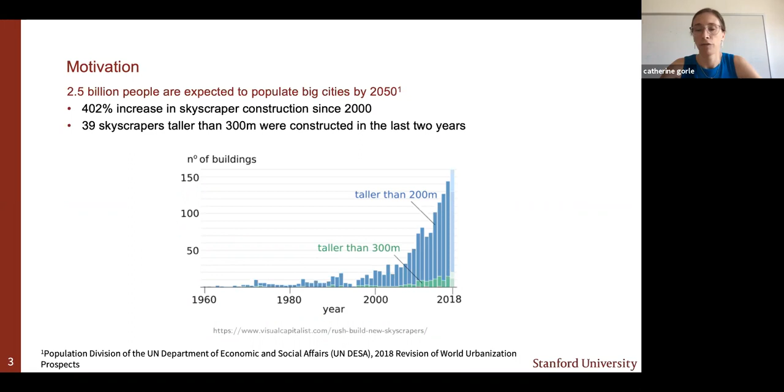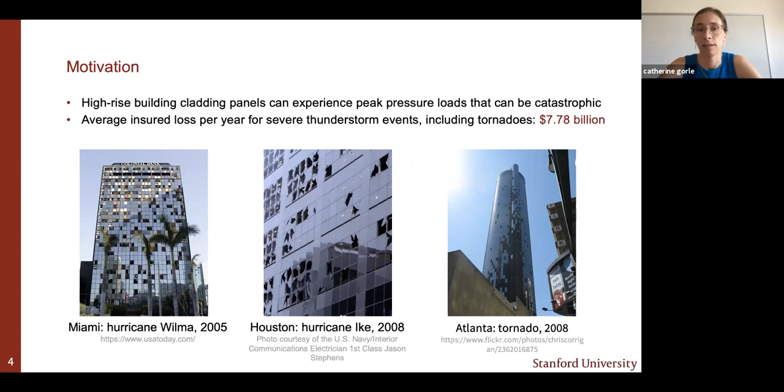So when we try to understand wind loading on buildings, there are different methods that you can use. Currently in engineering, you can use standards or codes where you compute design pressures and loads using empirical expressions. The advantage of that is that these are very straightforward calculations to do. The disadvantage is that they will have limited accuracy because you might, for example, have interference effects with surrounding buildings, or you might be looking at complex building shapes for which the empirical data was not necessarily obtained.

So the solution when wind loading is really a critical consideration in design is to do wind tunnel tests. And what you do in wind tunnel tests is you're going to record time series of pressures or forces on a scaled model in a wind tunnel. The advantage of this is that it's the established method for engineering design. We know how to do this and it's been done like that for decades.

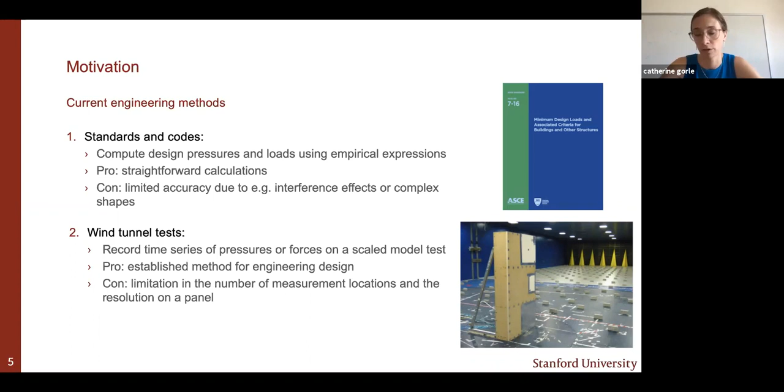A challenge though, when you really look at the design of cladding, is that you have a limitation in the number of measurement locations that you can put on a building and the resolution that you can achieve. Standard wind tunnel tests will sometimes only have one pressure measurement on the area that would be covered by a panel. And making the decision on what the average wind load on the panel will be based on just this one single measurement can lead to both over and under dimensioning of your system. And this is where CFD could actually provide a valuable alternative.

The advantage of CFD is that you would get a complete three-dimensional solution for the flow field. So your number of pressure taps is basically equal to the number of cells on the building facade. So now you can decide, given the size of my cladding panels, how many cells do I want to put on a cladding panel to calculate a good average load.

The disadvantage is that in CFD, you always have a trade-off between accuracy and cost. The main choice to be made is really how you're going to deal with turbulence. Either you do simulations that resolve larger scales of turbulence, those are large eddy simulations - relatively accurate but more expensive. When you do Reynolds-averaged Navier-Stokes simulations, you only solve for the mean flow, so you need to model all of the turbulence. These are much faster, but they won't be as accurate.

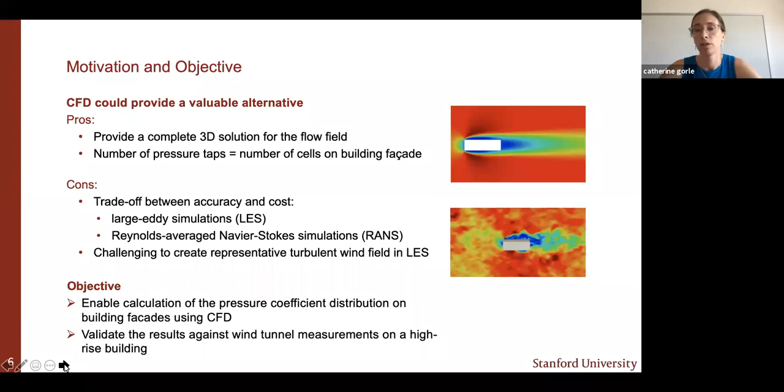In addition, it can be challenging to create a representative turbulent wind field in these simulations, and that particularly applies to large eddy simulations. So the objective of our work has been to enable the calculation of the pressure coefficient distribution on buildings using computational fluid dynamics. We focused on a high-rise building, and our goal is to validate our results against available wind tunnel measurements.

So this is a brief overview of the things I'll go over in this talk. First, I will introduce the test case and our quantities of interest in more detail. Then I'll give you a brief overview of the different steps, the different things that you need to think about when you set up a CFD simulation.

And then we'll go to how we generate a turbulent wind field in a large eddy simulation. I'll discuss how we set up the simulations and then how we do an optimization to actually get the wind field that we're looking for. Then we'll apply this to the simulations of the high-rise building.

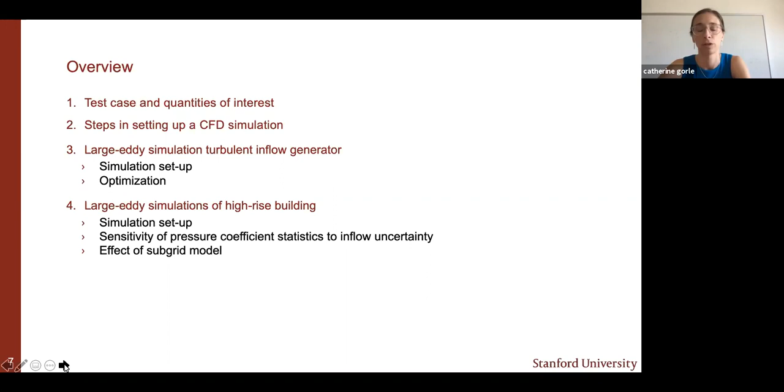So I'll again show you how we set up the simulation, and I'll discuss what the sensitivity is of our pressure coefficients to this inflow uncertainty. I'll also briefly touch on the effect of the subgrid model for turbulence. Then, depending on time, I might spend a little bit talking about Reynolds-averaged Navier-Stokes simulations as well, before wrapping up with conclusions and outlook.

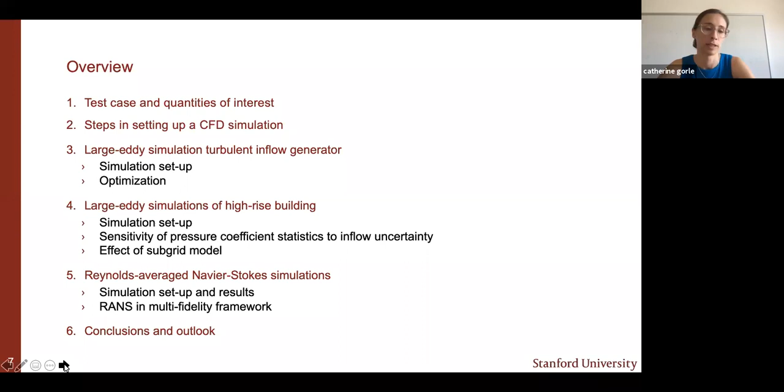Okay, so let's start by looking at our test case and the quantities of interest. We're looking at this high resolution experiment on a high-rise building, and all of the details on this experiment can be found in Luca Amerio's PhD thesis. We also have a paper in press comparing the measurements in Milan and the Wall of Wind.

Both of these data sets, the one from Milan and the one from the Wall of Wind, are available online. So if you're interested in looking at this test case and using it for validation of simulations, these data sets are freely available.

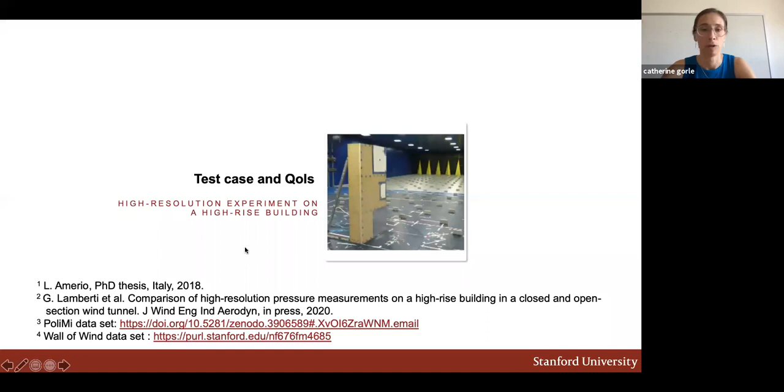So the case that we're looking at here is a 1:50 scale model of a rectangular plan building. It's 2 meters high in the wind tunnel, 1 meter long and 30 centimeters wide at model scale. It's tested in a closed loop wind tunnel of the Politecnico di Milano. In this wind tunnel, they generate an atmospheric boundary layer, a turbulent wind field, using a combination of spires upstream and then roughness elements further downstream.

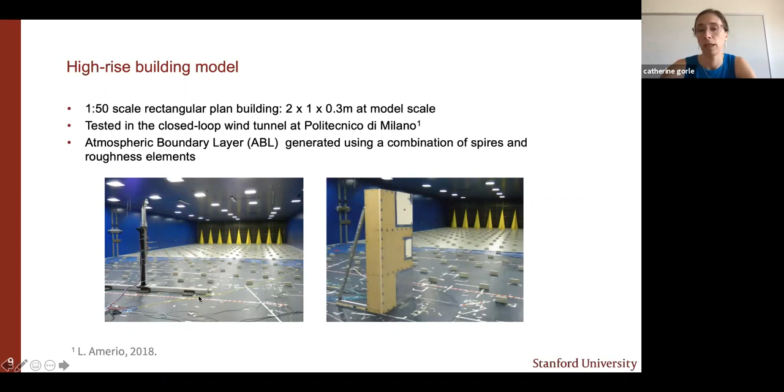And then you have the turntable where the building is located in this picture. But what they did first in this experiment is to really carefully characterize what the atmospheric boundary layer flow is that you get using this setup. And that's what you see in this slide.

They measured 5 profiles at different span-wise locations here on that turntable, at 52 vertical locations. The measurements were done with 3-dimensional hot wires, and we have 20-second time series with a sampling frequency of 2000 Hertz. So for each of these span-wise locations, we can now go and calculate statistics.

And what you see on the right here is the mean velocity profile, which follows a logarithmic law. We show both the mean of the 5 span-wise locations, but also the variation that you see over these different locations. The characterization of that variation was extremely useful when we did our simulations, because we could go and look at what is the sensitivity of our simulations to that uncertainty that we see in the wind tunnel.

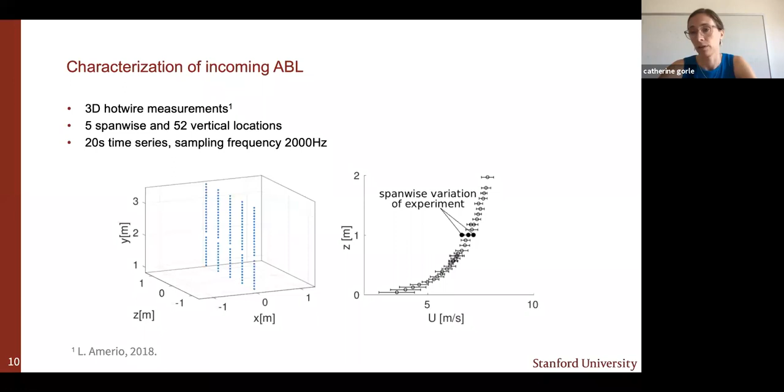The pressure measurements on the building - you see a side view here of the building. We're going to focus on the case with a wind angle of 0 degrees. And they have a focus on the critical locations near the corners and the edges, where you expect these high suction peaks to occur in the flow.

We have 224 pressure taps on each of these tiles, resulting in a minimum tap spacing of about 3.4 millimeters, so extremely high resolution. There are 300-second time series with a sampling frequency of 500 Hertz here. In this presentation, we'll combine the data obtained at 0 and at 180 degrees because of symmetry, which will allow us to look at the full pressure coefficient distribution on the top of the building, and then we'll have one tile upstream and one tile downstream as well.

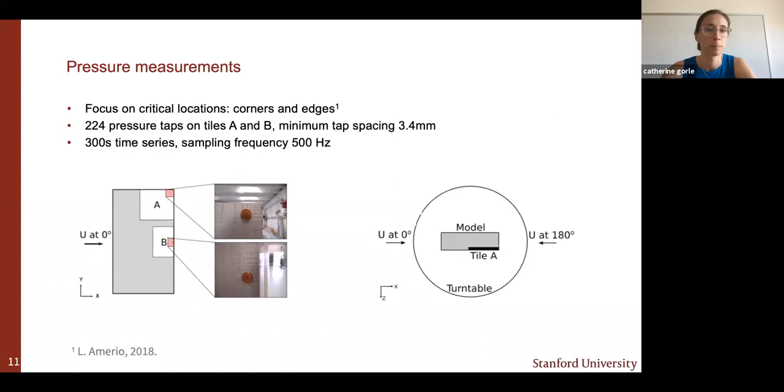These are results from an LES simulation, just to give you a sense of what flow topology we're looking at. The colored contours show the streamwise velocity magnitude. You see the incoming boundary layer with a logarithmic profile, so lower velocity magnitudes near the ground than up high.

That impacts the building, the flow goes up and down and to the sides of the building. So that results in unsteady separation regions, both on the building roof and on the building sides, and we also have that unsteady wake behind.

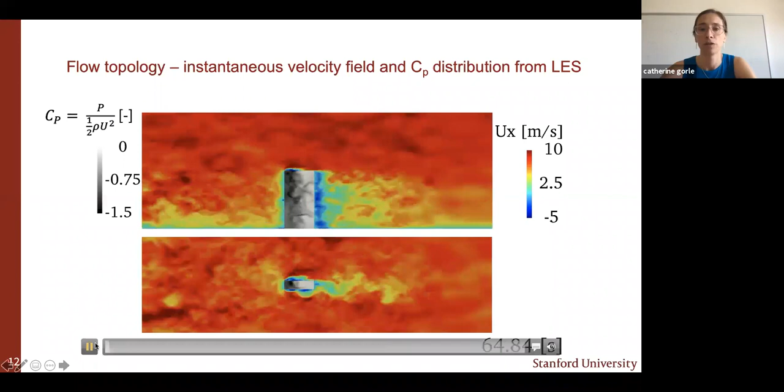The black and white contour here is the pressure coefficient, the non-dimensionalized pressure on the building facade. You see that where you have that unsteady separation, you get higher suction values that could result in failure of the cladding system.

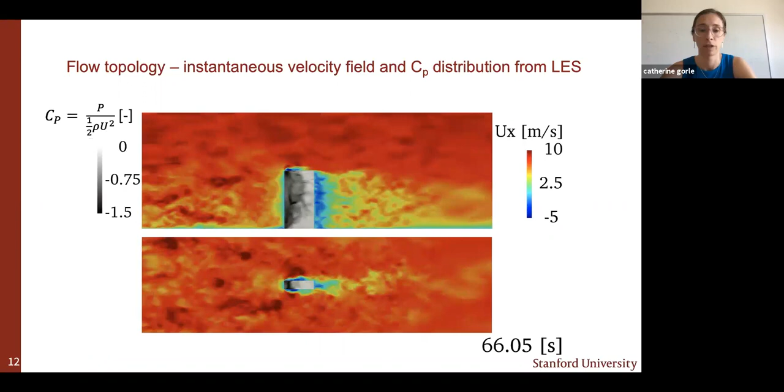So we're really interested in understanding what the time statistics of these pressure coefficients on the building facade are, because these are what will determine the wind loads on the building.

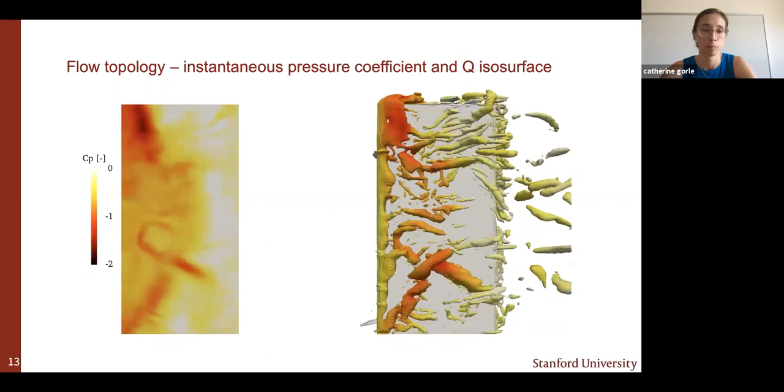When we look at a turbulent signal of a pressure coefficient, you would see something like this: time on the x-axis and Cp on the y-axis. We're interested both in looking at the mean pressure coefficient, the root mean square of this signal, but also the peak pressure coefficient—what are really the peak loads that you will see?

Because we have these point-wise measurements, we can look at local peak pressures, but what is really of interest for engineering design is the peak pressure load on an entire panel. So you want to average over the panel first and then calculate the peak load. These will be our four quantities of interest that we'll be looking at.

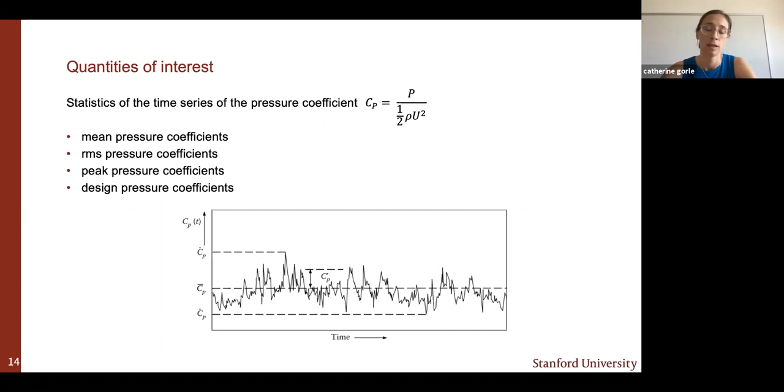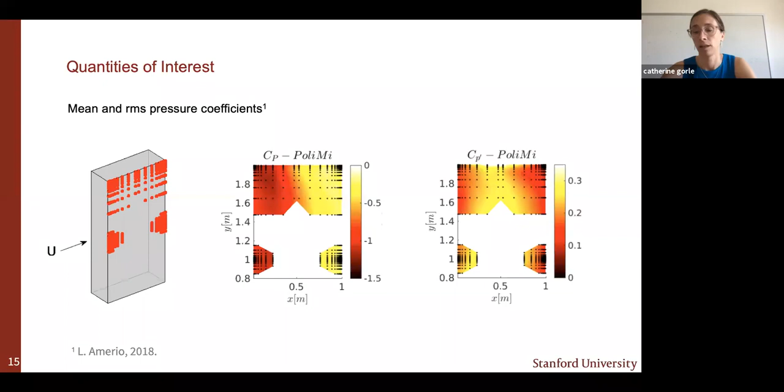Then to get to the peak pressure coefficients, we don't just look at the time series and extract the most negative peak—there is actually a statistical process to determine this, and we do that using the Cook and Mayne method.

So you look at this time series of Cp, and for a peak coefficient, that is the value in one pressure tap. For the design pressure coefficient, that is the value averaged over all the pressure taps on a tile.

You divide this time series into a number of windows, and in each window you extract the most negative peak. Once you have done that, you fit a Gumbel distribution to all of these peaks so that you can find the pressure coefficient relative to a specific probability of exceedance. In our case, we'll look at a 22% probability of exceedance. So what these look like is the following.

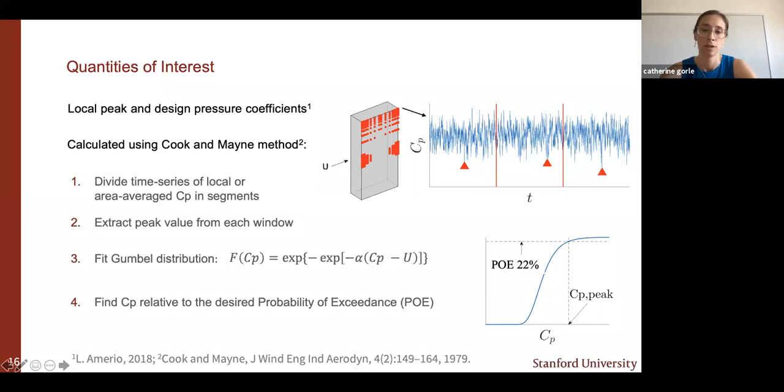So first I'll show you the local peak pressure coefficient at each of the pressure taps. You see that you get these highest values inside of the separation bubble.

Then when we look at the design pressure coefficient on the cladding panel near the top corner, we look at different panel sizes. You see that the CP design becomes less negative as you look at bigger panel sizes, because you're starting to filter out these local negative peaks.

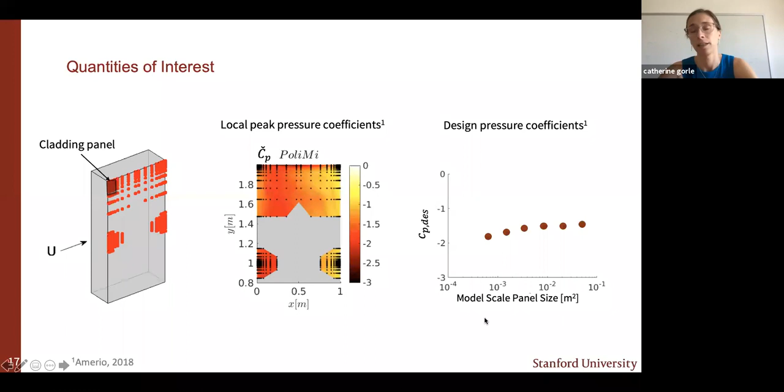This is actually important when you think about doing simulations, because getting these local peaks exactly right will be very difficult - that would require resolving all of the turbulence. But getting the design pressure coefficient right becomes a little easier, because you're actually averaging over an area.

Okay, so in the next part here, I want to go over the steps in setting up a CFD simulation. The idea here is really to highlight what the things are that you have to think about when you set up a CFD simulation, such that you're following best practice.

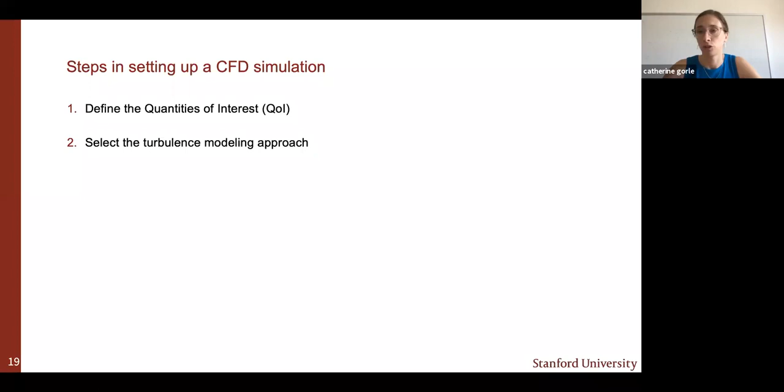The first step is always to define your quantities of interest. We've done that here - we said we're interested in the statistics of a turbulent pressure coefficient. When you know what you're really interested in, you can go and select your turbulence modeling approach. This is probably the most fundamental choice you're going to make, so let's look at that in a little bit more detail.

Turbulence is one of the unresolved problems of classical physics. It's characterized by unsteady aperiodic motions with random three-dimensional spatial variations. There's a strong dependence on the initial conditions, and in a turbulent flow you see a wide range of scales that we call turbulent eddies.

What we often do in a turbulent flow is look at an energy spectrum - what is the energy content at different frequencies or wavelengths in the flow. What you see in turbulence is that you have larger scales where you have production of turbulence kinetic energy, then an inertial subrange where that energy is moved from the larger scales down to the smaller scales where you then have dissipation.

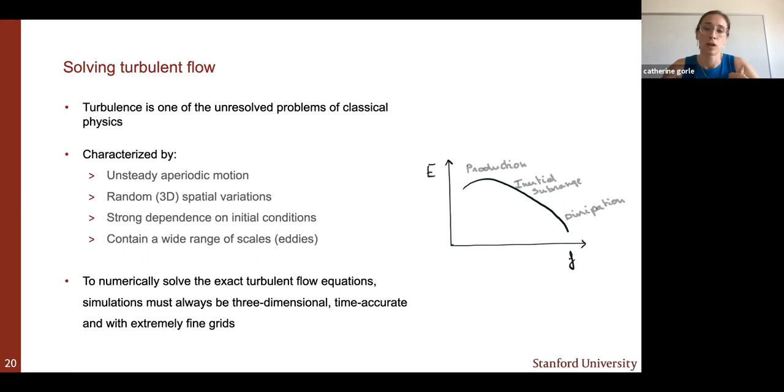If you want to numerically solve the turbulent flow equations fully, then your simulations have to be three-dimensional, they have to be time accurate, and they have to resolve all of these scales that you see in the flow, which requires extremely fine grids. So if you look at the different ways of solving a turbulent flow, it basically reflects how much of the turbulence you resolve.

A direct numerical simulation will resolve all of this turbulence, but that is not affordable for the type of simulations that we're looking at. Our Reynolds numbers are too high and our geometries are too complex.

So the next best thing that we can do is a large eddy simulation. In a large eddy simulation, we're going to be resolving these larger energy containing scales of turbulence, and we're only modeling what happens at the subgrid scale. These simulations can still be very accurate, and they are actually feasible for complex engineering flows.

Then the next step you could do is Reynolds averaged Navier-Stokes simulations. If you do this steady Reynolds averaged Navier-Stokes simulation, you only solve for the mean flow, and you would be modeling all of the turbulence. You can imagine that coming up with a model that represents all of these scales and their effects on the mean flow is much more difficult than this.

We've been trying to develop good turbulence models for decades, but still for bluff body flows, like what we're looking at in wind engineering, these models will not be very accurate. They are, however, very quick - you can get a solution in a matter of hours, while here we're talking more about weeks.

So I'll be mainly focusing on large eddy simulations because it's generally accepted that for wind loading, you want to be resolving these turbulent scales of motion. If I have time, I'll touch a little bit on RANS simulations at the very end.

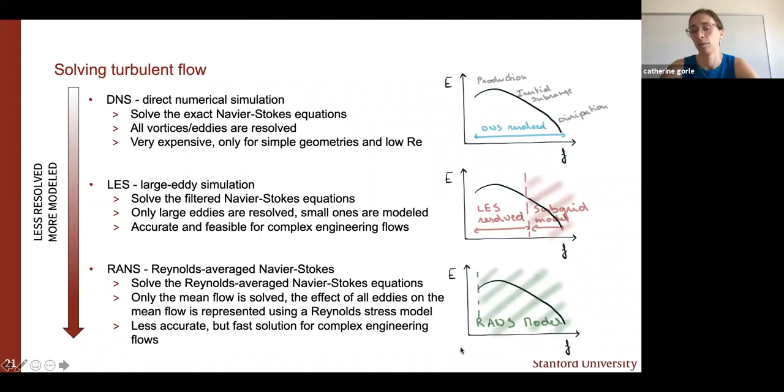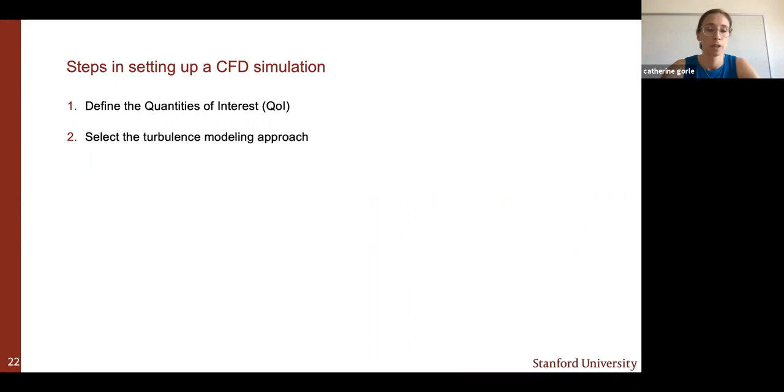So you select your turbulence modeling approach, and then after that you have three steps that are basically about setting up your model, your mesh, and how you're going to solve your equations.

You need to define your geometry and computational domain, which means thinking about the level of detail in your model. For example, if your building has balconies, will you be resolving those in the geometry? You need to think about the size of your domain and the position of your boundaries, since you don't want unintended effects of your boundary conditions on your flow solution.

Then you have to generate your computational mesh, discretizing your computational domain. Mesh quality and resolution are very important because you want to resolve all of the important features in your flow. Checking grid dependency is essential. We will never do a simulation with just one grid resolution; you will always check what happens with different resolutions.

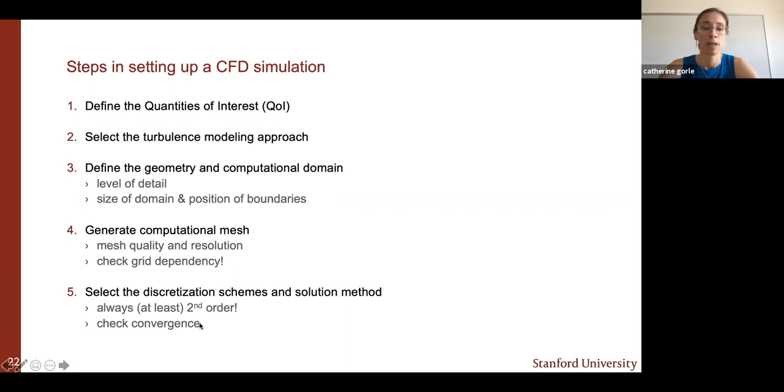Then selecting discretization schemes and solution methods, you always want to use at least second order schemes, and it's very important to check convergence of your solution. I'm not going into a lot of detail here because there are best practice guidelines available for all of these. So if you're setting up CFD simulations, it's a good idea to check these best practice guidelines.

Two of these focus on RANS simulations, but there is one that goes more into LES. The concerns you have in RANS simulations, for example the geometry and the boundary conditions, are also very similar to those in LES.

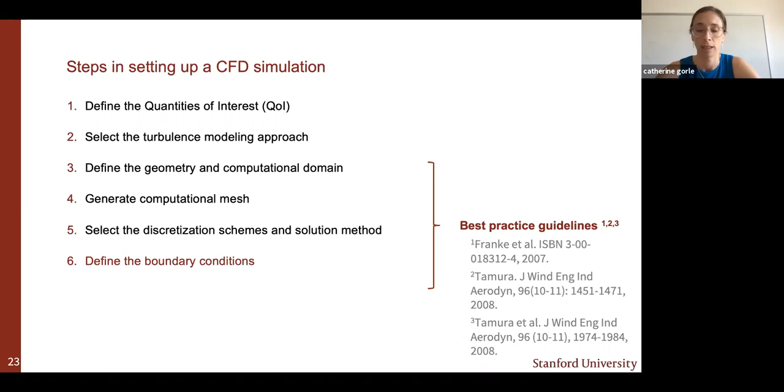The other thing you have to do is, once you have your domain and know where your boundaries are, you also have to define your boundary conditions. There is some guideline on that in best practice guidelines, especially for RANS. Here I'll discuss much more what we will do for LES in our sections on the actual simulations.

Then setting up post-processing—when you do LES, that actually requires very careful consideration because you cannot afford saving your entire flow solution at every single time step. So you need to think in advance about where you want to save time series, and what kind of mean flow solutions you want to save as well. Validation is the other thing I'll address in detail as we move on.

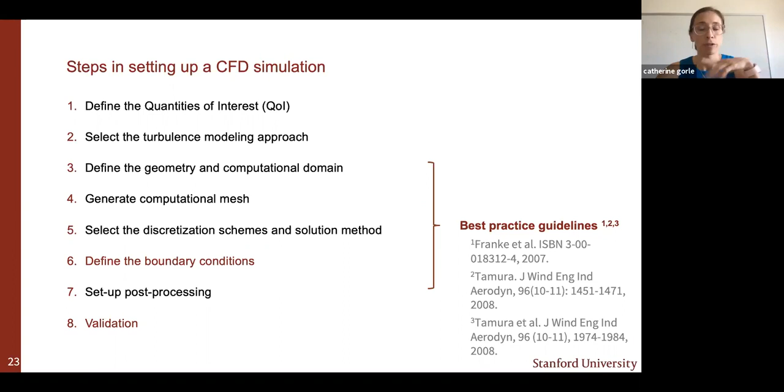The boundary conditions are really very important, and I mentioned already in the beginning that especially the inflow boundary conditions in LES can be challenging. So I want to spend a bit of time talking about how we do this in a large eddy simulation. Since we're trying to validate against a wind tunnel boundary layer, our focus here will really be on reproducing the boundary layer that we see in the wind tunnel.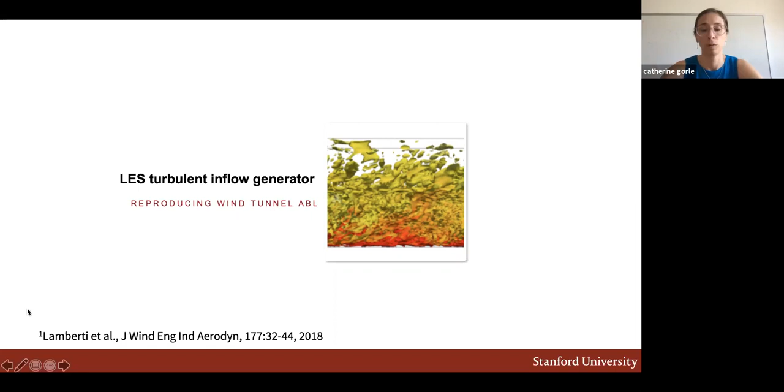This has been published in this reference here, so if you want more details you can look there as well. The setup of this inflow calibration looks as follows: in this picture on the right, you see what our domain looks like with the high-rise building in it. We have a relatively long domain—our high-rise building is about 5 meters from the inlet of our computational domain.

What we want to achieve is that our turbulence statistics at the building location will actually match the statistics we see in the wind tunnel. So what we do here is specify a slightly smaller domain to make sure the simulations will be affordable, and we ensure that whatever we specify at the inflow gives us the turbulence statistics we want 5 meters further downstream.

The size of this domain is 10 meters long, 4 meters high, and 3 meters wide, discretized with 5 million cells. Our first cell height is 6.25 millimeters, giving us a Y plus of around 300 on the ground wall. That's a non-dimensional wall unit that tells us how much of the near wall turbulence we will be resolving. In this case we're not resolving it, because we would need a Y plus of 1 to do that, which implies we'll need some sort of wall function, which I'll talk about as well.

We set up this simulation with the most simple subgrid model, because that was the starting point—we wanted to see with the most simple model what kind of results we could obtain.

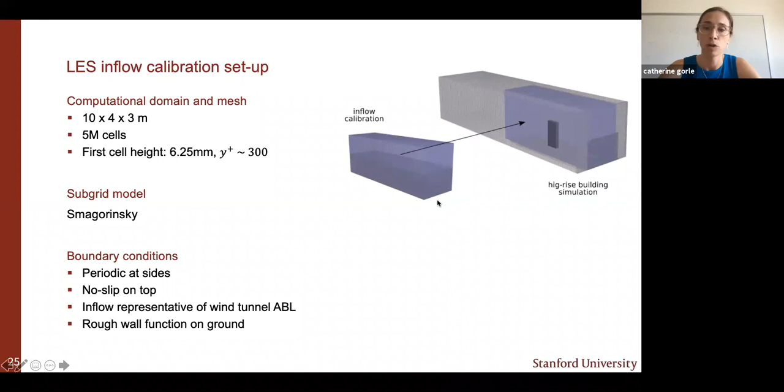I'll talk more about the inflow and the rough wall function on the next slide. In terms of the solver, we use OpenFOAM with a pisoFoam solver, which is also the solver used in all of the SimCenter tools. We use second-order discretization schemes and second-order implicit time stepping with a time step of 0.002 seconds, giving a CFL number of less than 0.2.

In large eddy simulation, it's always important to let the turbulence and flow develop to a quasi-steady state before you start taking values for statistical averaging. Our burn-in period was 60 seconds, and statistical averaging was done over 160 seconds. These simulations took 5,000 CPU hours on 32 processors, about a week on Stampede2. These are really representative of what you'd get using the SimCenter tools, since they also use the Stampede2 cluster.

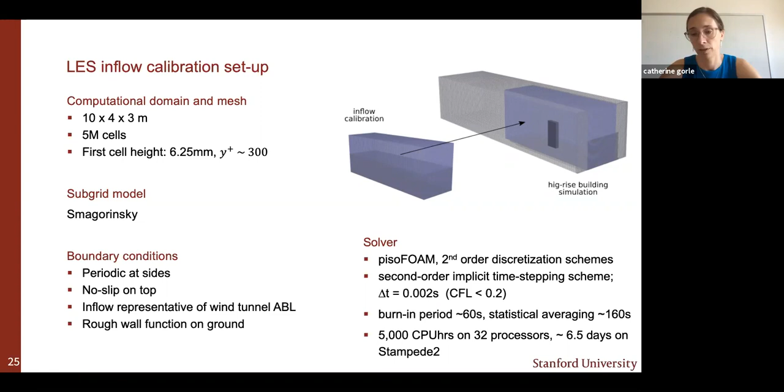Let's look a bit more at what we need if we want our flow to be representative of the atmospheric boundary layer in the wind tunnel. In terms of the mean velocity profile, we want something that follows a log-law fit, and you see that here from the wind tunnel data: a friction velocity divided by the von Karman constant, then the log of the height above the ground, and the roughness length Z0.

In order to sustain that mean velocity profile, you have to make sure that your boundary condition on the floor of your domain, or the floor of your wind tunnel, supports this. This is what you'd see in standard CFD codes - people have looked at this a lot for Reynolds-averaged Navier-Stokes simulations, and you need to do just the same for a large-eddy simulation.

If you're not careful and you impose a log-law profile like this one at the inflow of your computational domain, and just solve the simulation with a standard wall function on the ground, you'll see that this profile evolves. By the time it reaches your building, it might look very different from what it actually is in the wind tunnel, which would obviously affect your validation effort.

So what you want to do is ensure that the wall function you specify on the ground corresponds to that log-law profile and supports it. When you do that, you won't have any unintended streamwise gradients of your mean flow. That's a solution for the mean velocity profile, but we still have the challenge of representing the turbulence content correctly.

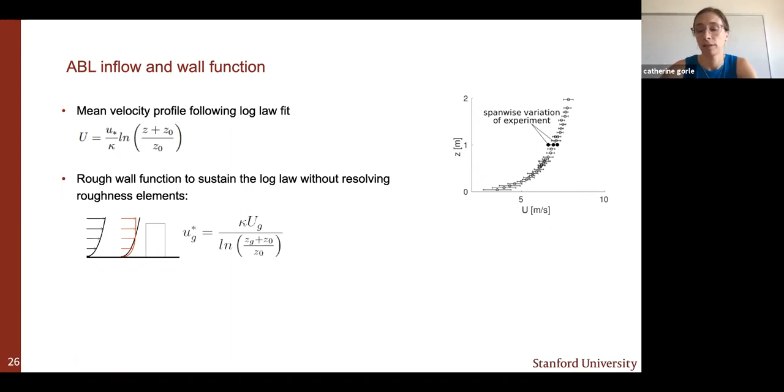This is the profile of turbulence kinetic energy that we see in the wind tunnel. What we want in our simulation is that at the location of the building, our statistics match this type of profile. So how can you do that?

I'll be talking here mostly about Reynolds stresses, which are equivalent to turbulence intensities. In wind engineering, we're more used to talking about turbulence intensities, but when you actually work with the solvers, you specify Reynolds stresses. So I'll mainly be focusing on Reynolds stresses going forward.

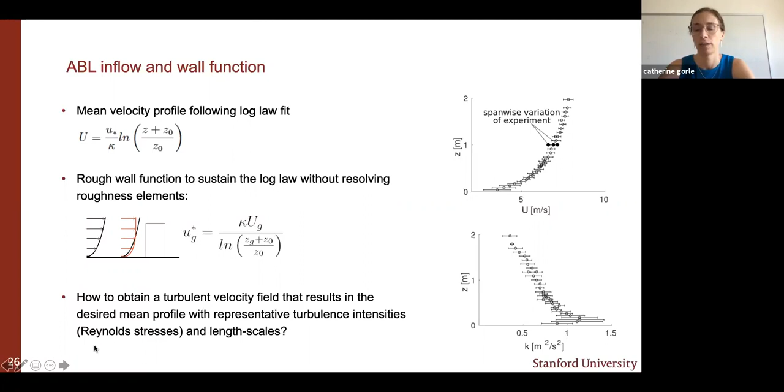There are two ways to generate this inflow. One is to do a precursor simulation that actually resolves spires and roughness elements, just like in the wind tunnel. The turbulent wind field you get out of this depends on how well you can resolve these roughness elements in your LES simulation, the subgrid model you're using, the discretization schemes, etc. So you're not guaranteed that when you do an LES simulation of this, you'll get exactly what you have in the wind tunnel at the end of the domain.

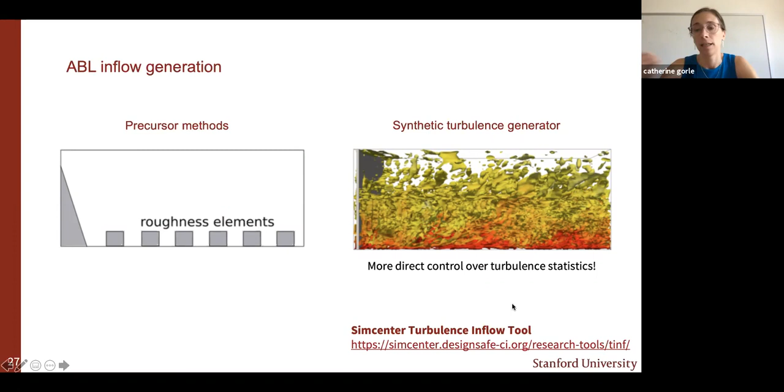Synthetic turbulence generators offer more direct control over turbulence statistics, because you specify into these generators what your Reynolds stresses are and what you want your length scales to be. This gives them an obvious advantage, but there's a really big challenge here too. This is the approach we'll be using since we want to avoid resolving these roughness elements, and it's also what the SimCenter has been pursuing - they have a turbulence inflow tool available at this link that implements different types of turbulence generators.

The one that we will be using specifically is a divergence-free turbulence inflow that was developed by Xie and Castro, and then further modified in this paper to be divergence-free. What you get here is you specify this unsteady three-dimensional velocity field at the inflow.

It's a two-dimensional velocity field because you specify it at every time, it becomes three-dimensional. And you see the inflow plane here, for example. It's a function of this mean velocity profile, so your log-law, and then all of the Reynolds stress components that we have from our wind tunnel experiment, plus our integral time scales, which will determine the length scales of the turbulence.

So you generate this using a digital filter. You get a field that looks like this at one point in time, and then you generate an update every time step. And we impose that inside of the computational domain. That makes it run through the correction step of the PISO algorithm, and it ensures that the flow field you get out is divergence-free. That's important because if you do not do that, you would see really big artificial pressure fluctuations, which would obviously influence your pressure statistics.

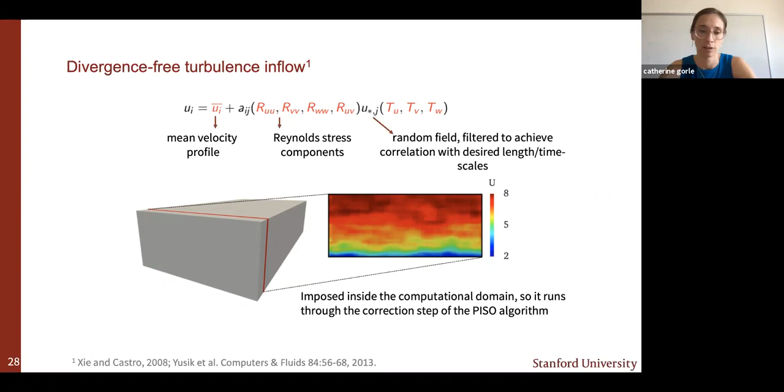Okay, so this is a standard approach that has been published. Now, the challenge when we use these in simulations like the one that we wanted to do, is that the synthetic turbulence is not a solution of the system of equations that we're solving.

So what happens is we put something in at our inflow generation plane, and I'm looking at turbulence kinetic energy here, so the magnitude of the turbulent fluctuations. And as you move downstream, you see that we lose a lot of that turbulent content. And by the time we get to the building, the intensity of our turbulence is much less than what we actually intended, or than what it is in the wind tunnel.

And we've done simulations like this, and what you see is that you're really under-predicting the pressure fluctuations on the building.

Okay, so we need a solution for this, right? One way would be to actually start resolving all of these roughness elements. Again, that would help, but it would really increase the cost of the simulations by a lot, and we wouldn't still be guaranteed that we get exactly the conditions that we want at the building location.

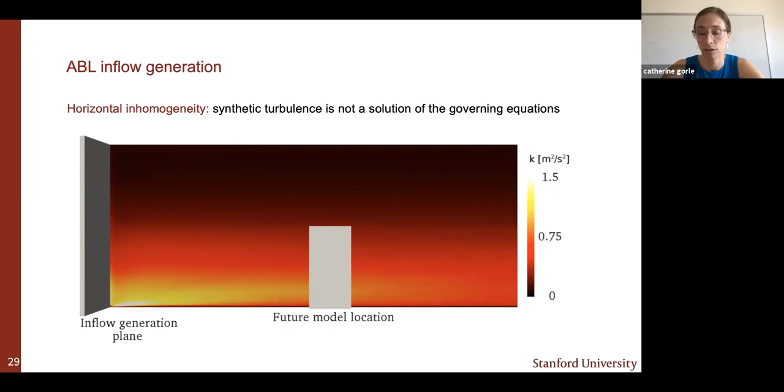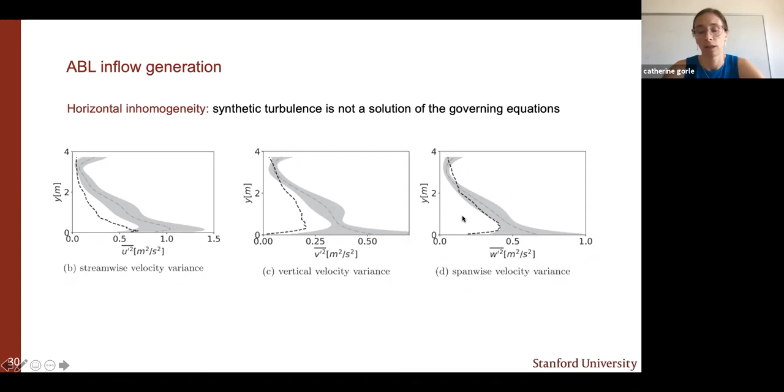So how we decided to try and solve this is by doing an optimization. So we put into our divergence-free inlet generator the Reynolds stresses and the length scales. We run the actual LES, and we get, without the building, but at the location where we want to put the building in our future simulation, we extract the statistics.

And we get these statistics, Reynolds stresses and turbulent length scales, and we compare them to the experimental value. If that is less than a certain allowable error, we say, okay, we found our inflow conditions and we can go run our simulations. If it's not, then we do a gradient-based optimization until we actually find the inflow conditions that will give us what we want at the building.

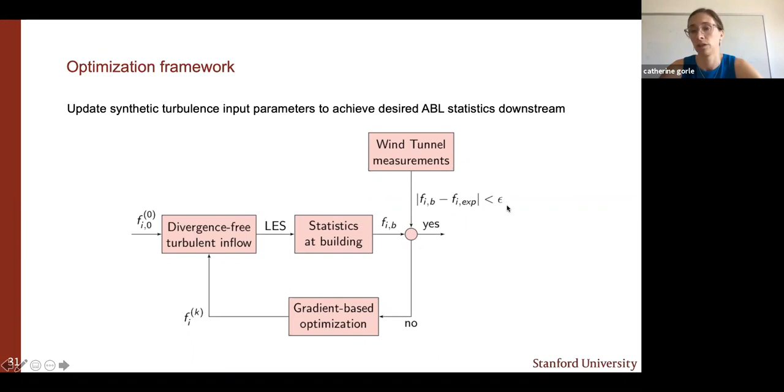So in order to select the design variables, because we have three Reynolds stresses and three length scales here, and varying all of these might make the optimization very expensive, we first did a sensitivity analysis.

And what we did is we multiplied each of our input values by two, and then we looked at what effect that had on the turbulence content in the simulations.

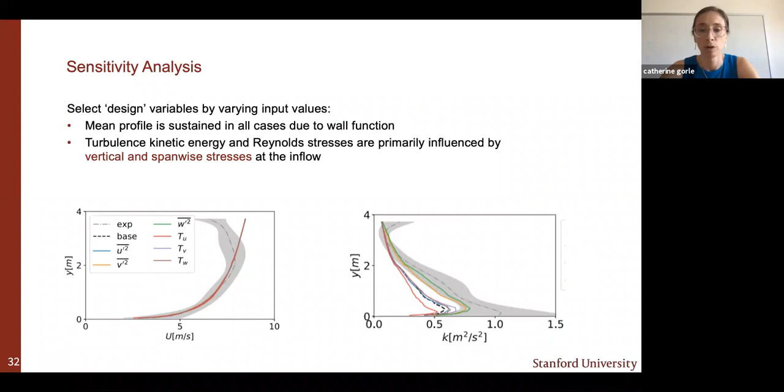That means our vertical and span-wise stresses are actually the ones that will have the biggest effect on the turbulence kinetic energy at the building location. So we're going to use these as our design variables in our optimization.

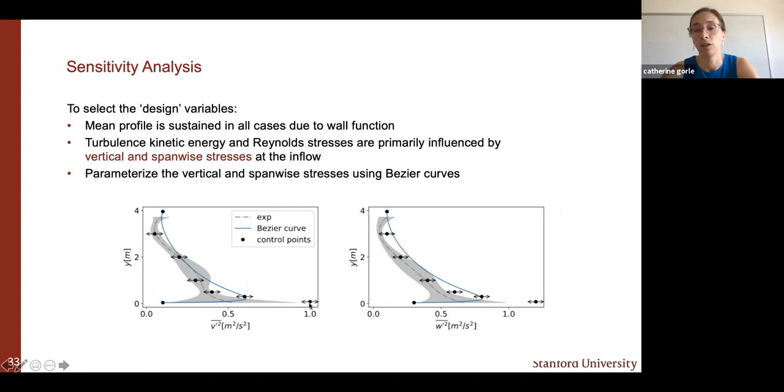Because these are profiles that vary with height, we decided to parameterize them using Bézier curves, which gives us control points at different heights that we can change to get our optimal inflow condition. So our decision variables are these Bézier points for the span-wise and vertical Reynolds stresses, and time scales as well.

Our cost function is the least square difference between the goal function at the building site and the measurements. We treat the Reynolds stresses and the integral time scales independently to make the optimization more affordable.

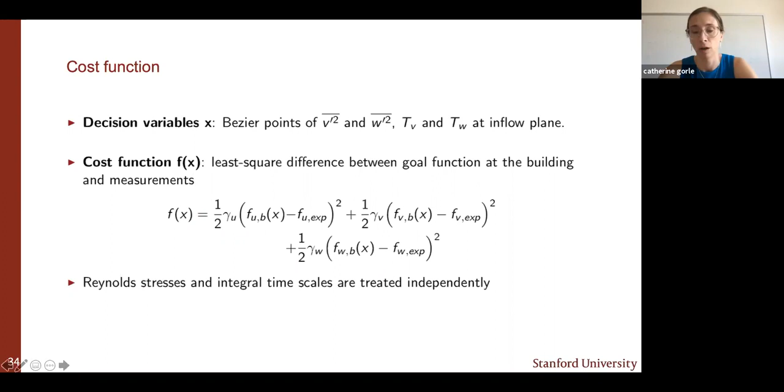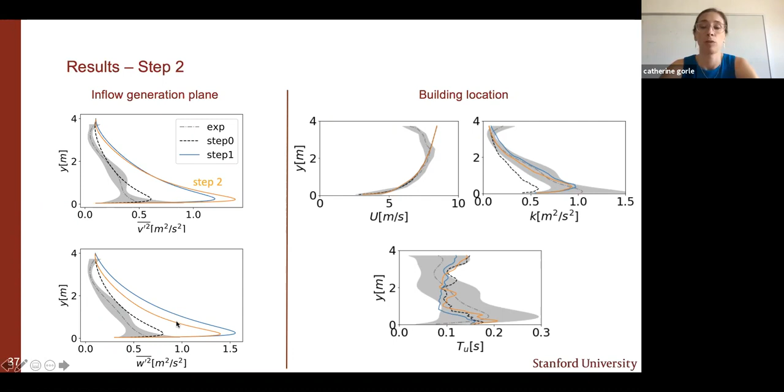In step 1, these values are more or less multiplied by 2, and we already get a much better match to our wind tunnel data. Then we did one additional optimization step, which improved the comparison a little bit. So now we take these orange profiles for our Reynolds stresses and use these for our simulations.

To wrap up on this section on the inflow simulations: using a rough wall function is very important to support maintaining your mean velocity profile. By adjusting your Reynolds stresses and length scales at the inflow, you can ensure that you achieve the desired turbulence statistics at your building location.

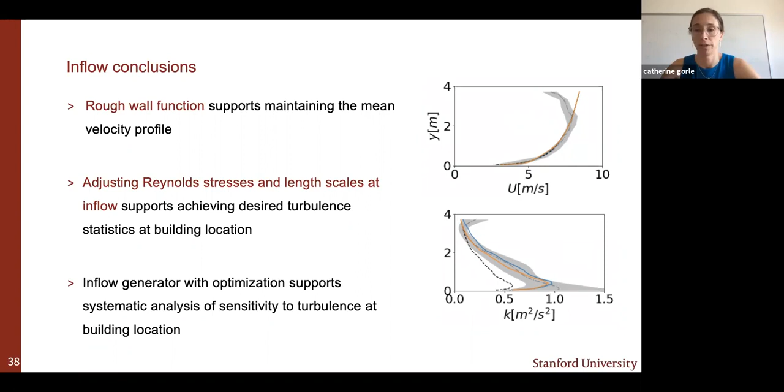The interesting thing is that this inflow generator with optimization will also support a systematic sensitivity analysis, because we can now vary our inflow parameters to get different target turbulence intensities at our building location and check the sensitivity of our solution to this. So that's what we'll discuss next.

This section focuses on the simulations with the actual building and prediction of mean, root mean square, peak, and design pressure coefficients. We have a paper under review here. We just got back the first review comments, and we should hopefully have this published in just a couple of weeks.

Let's look again at the setup of this simulation. Now we're looking at our bigger computational domain: 20 meters long, 4 meters high, and 5 meters wide. We have 7.5 million cells, and we checked grid sensitivity by looking at the simulation with a coarser mesh. That simulation showed a very limited influence on the mean pressure coefficient and also on the root mean square.

But when you look at a turbulence spectrum, like I sketched in the beginning, you do see that the fine mesh is better able at resolving the turbulence into that inertial subrange. That's why we went ahead and used the finer mesh for our simulations.

The wall resolution at the ground is the same as in our inflow calibration study, and the resolution on the building is slightly higher—we have a Y plus of 100 here. So we're still not doing a wall resolved simulation, and we'll still need a wall model on the building. We again use the simplest subgrid model available for now.

Our boundary conditions are very similar to what we did in the inflow calibration. On the side boundaries, we have periodic boundary conditions to ensure we're not damping the turbulence. We have no slip on top. At the inflow, we do our digital filter with the optimization. On the ground, we use the same rough wall function discussed before, while on the building wall we use a standard smooth wall function because the wind tunnel model is also smooth.

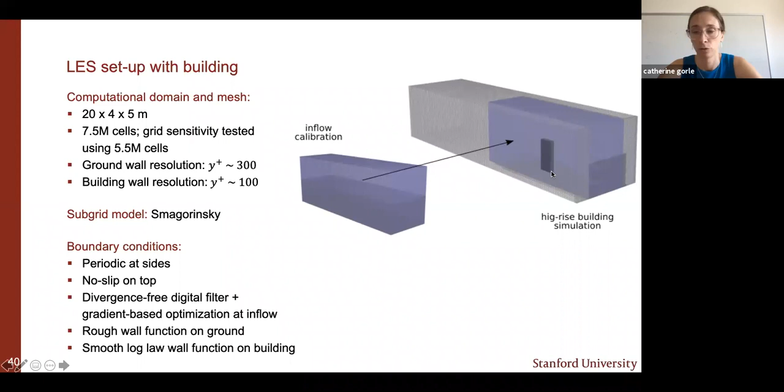In terms of the solver settings, we use the same solver and schemes. We need a smaller time step now because we have a higher resolution mesh right on the building that requires that smaller time step.

Our burn-in period is about 10 seconds and statistical averaging is about 60 seconds. Ideally this would be larger, but you can see why we stopped the simulations at 60 seconds. These take about 80,000 CPU hours on 64 processors, about 7 weeks of calculation time on Stampede. You could use more processors to reduce this physical time, but because of the scaling in OpenFOAM and the fact that our mesh is not that large, we would actually increase the total CPU hours since the scaling wouldn't be ideal.

So let's look at how we want to check that sensitivity to the inflow boundary condition. In the very beginning, I showed you the span-wise variation you have in the wind tunnel when they measure the different profiles. You can see here in gray that variation is shown, for the mean velocity, the turbulence kinetic energy, and the stream-wise time scale.

In our inflow generator, the mean velocity depends on the roughness height, and the turbulent components are a function of turbulence kinetic energy and the time scale. We're going to vary these three parameters to get profiles that somewhat represent the range we've seen in the wind tunnel experiment, and we've done the inflow optimization to get these different profiles.

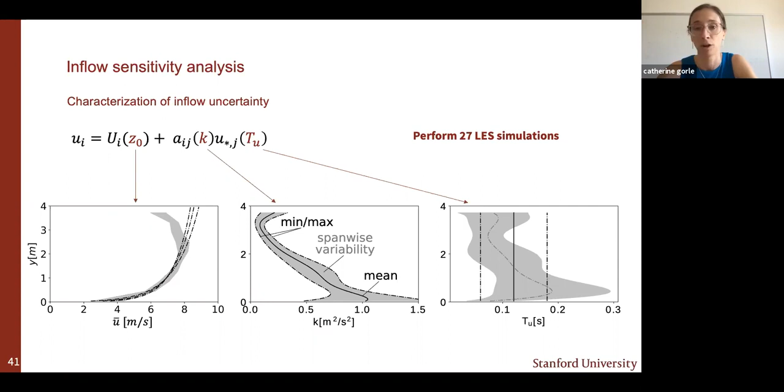To compare more quantitatively, you can look at profiles, focusing on one row of taps here, in the streamwise direction. You have the mean pressure coefficient in the plot on the left and the root mean square in the plot on the right. We're showing the result for the baseline LES, with mean values for these inflow conditions, but also the sensitivity to the variability in the inflow, shown as this gray area.

So we see that the inflow uncertainty does not really affect our mean pressure coefficient prediction that much, but it really has a significant effect on the prediction of the root mean square pressure coefficient. Representing any uncertainty in this respect in your simulations is key when you do this type of validation studies.

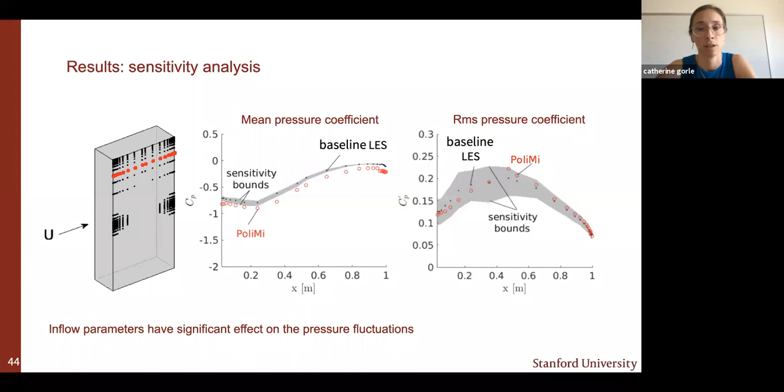The larger the time scales, the higher they will be. This needs to be interpreted with some care, as discussed in more detail in the paper, because it wasn't possible to only vary the time scale and keep the turbulence kinetic energy constant. So when we move to larger time scales, we also see an increase in turbulence kinetic energy. This effect is a combined effect of what happens to the time scale and what happens to turbulence kinetic energy. So the turbulence statistics are really important when looking at these pressure fluctuations.

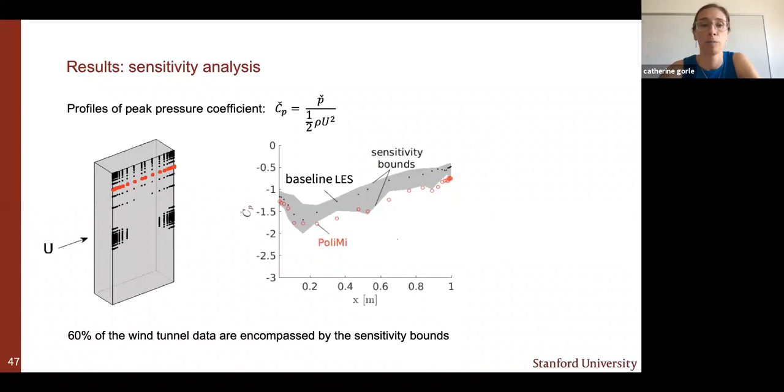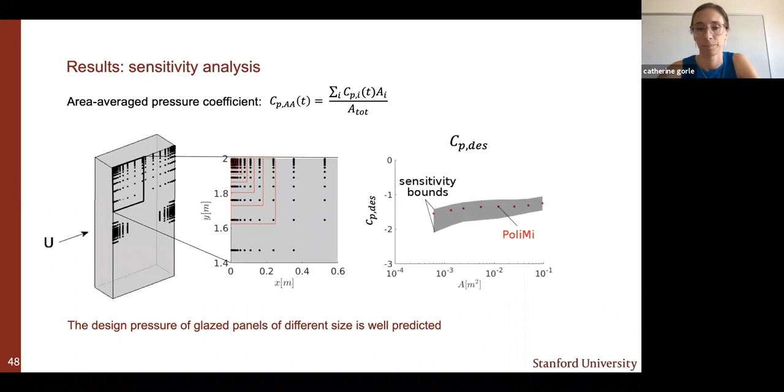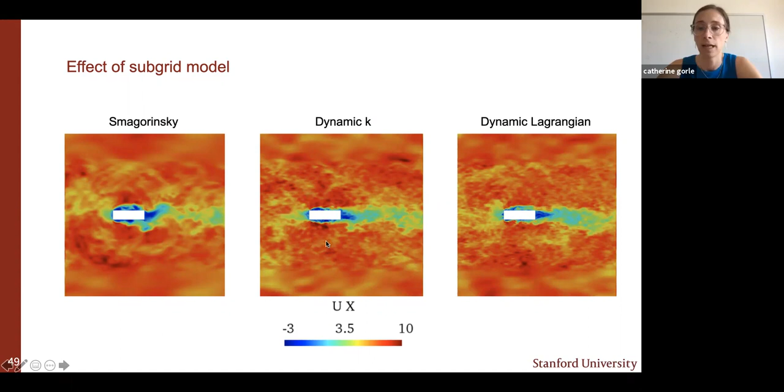Then to finish the section on the LES here, I want to quickly talk a little bit about subgrid models. As I mentioned, we use the most simple subgrid model in these simulations, which is the Smagorinsky model on the left here. Then we also wanted to look at what happens when you use dynamic models, so we ran simulations with both a dynamic K and a dynamic Lagrangian model. What you see here in these instantaneous velocity contours is something that we know, which is that a standard Smagorinsky model is quite dissipative. So the smallest turbulence scales will be dissipated and you won't really resolve them in the flow. These dynamic models are much better capable of doing that.

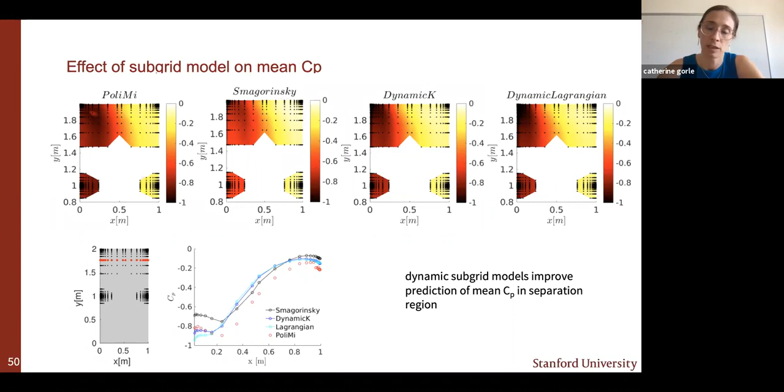What does that mean when we look at the mean pressure coefficient? Here you have the experimental data, the simple Smagorinsky model, and then the two dynamic models. We see that these models actually do better at predicting these negative pressures in the suction, in the separation region of the flow. You see the same here in the profile, right? You really get that decrease in the pressure coefficient. This is a sign that dynamic models might really have some benefit in predicting what happens in these separation regions more accurately.

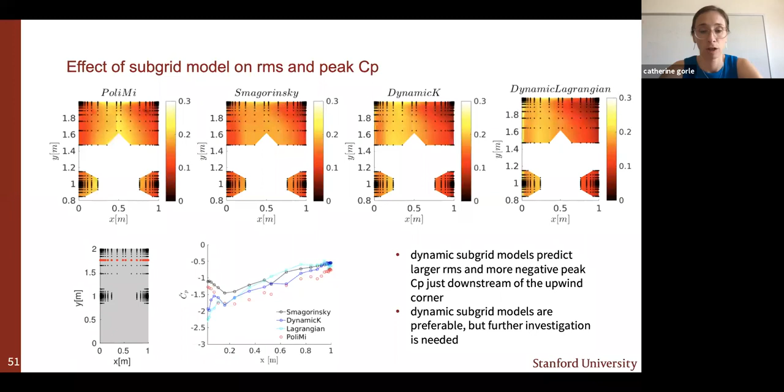So these are the peak pressure coefficients on this row of taps. This is what we had with our Smagorinsky model, and then this is what we obtained with the dynamic model. We again see these artifacts here, right? So in my opinion, dynamic subgrid models are preferable because they do resolve turbulence better, but I do think we need further investigation to look into what's happening here at these corners before recommending using these models for design purposes, for example.

Okay, so in conclusion on the LES simulations, if you design your LES carefully, you can reproduce pressure coefficient statistics with good accuracy. The root mean square and peak pressure coefficients are highly sensitive to the atmospheric boundary layer statistics that you have at the building location in your simulation.

And that is the same thing in the wind tunnel, right? It is often said that this is the reason why you would get different results in different wind tunnels, because these statistics do not match exactly.

Dynamic subgrid models are preferable, but we need to look more into the behavior near the upstream corner for the models that we've tested so far, at least. And then the computational cost remains a limiting factor, especially if you want to use these simulations for design.

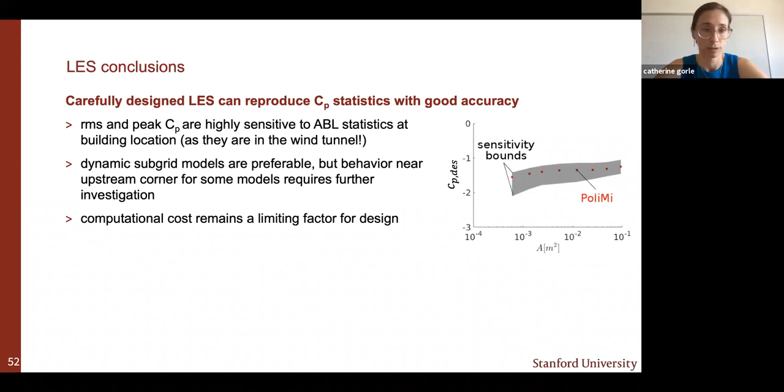Important takeaways for validation studies: experimental data sets that are used for validation should really report detailed atmospheric boundary layer measurements at the building location, including uncertainty intervals. And then on the simulation side, we should really do an effort of accounting for this uncertainty when we compare results. Even if in the wind tunnel they can characterize the boundary very accurately and the uncertainty is negligible, it's unlikely that your LES will match it exactly. So you might still want to check sensitivity because of these discrepancies that we will see.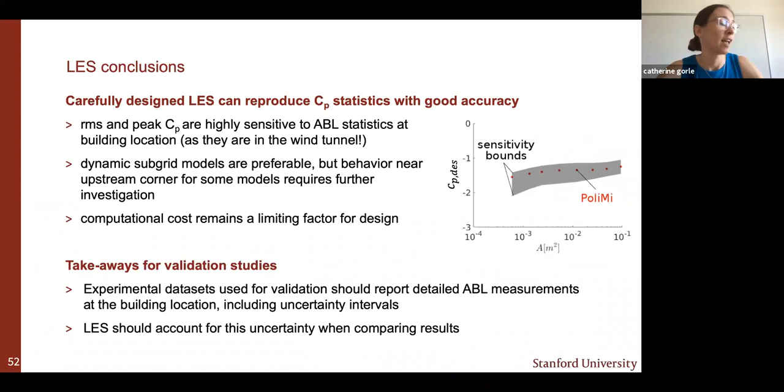Since I have been a little slow, I'm going to skip the section on RANS modeling, and I'm just going to end by giving you some ideas on moving forward.

So we have been looking at further investigation of subgrid models, and initial results with the Vreman model seem promising. So we're looking more into that.

It's also very important to start thinking about different wind directions. This 0-degree case that I've presented here today is actually a very special case due to symmetry, and we've come to realize that as we look at more and more wind angles. We should acknowledge that this exact 0-degree case is probably not going to occur that often in reality.

Speeding up the computations is something that we're really looking into as well. There are methods that support larger time steps, which can really help a lot in speeding up the simulations, particularly by using multi-grid techniques. We've also been looking at using a weakly compressible solver that doesn't require solving a Poisson equation, and that has really shown us very, very good speedups.

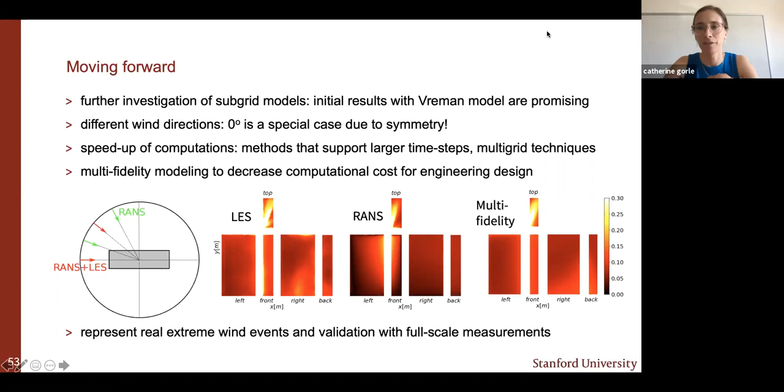They note that the region of RMS pressure and peak pressure do not overlap, and they're asking if there's a reason for that. Yeah, it's because the peak pressure is also influenced by the mean pressure. So let me try and guess which slide we'd be looking at.

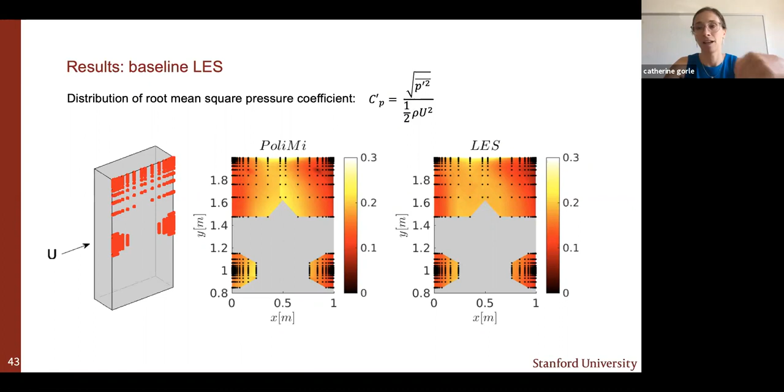For the mean, you see the most negative pressures inside the separation region. For the root mean square, you get them more in the reattachment region. But the peak isn't only determined by turbulent fluctuations, it's also determined by the mean. That's why for the peak you'll see these values moving upstream a little bit, into the area where the mean is already very negative, and then the turbulence makes the largest peaks occur there.

I hope that answers that question. I hope so too. It's a really good one though, because every time I look at these, I remind myself that that is what it is. So, all right.

For the LES and wind tunnel comparison, you selected a particular row of taps to do the comparison. What was the basis for selecting that row and not others? We've done this on different rows, and when we presented the data, we tried to pick a row that was most representative of what happens over most of the building.

In our paper, we also pick a row of taps on the lower tiles here, so we have an additional row of taps there. These are really quite representative for what happens elsewhere, except for what happens at the real top corner. But these phenomena are so localized that for design, they're not necessarily that interesting to focus on.

Okay. What was the value of the Smagorinsky constant that you used in the model? The standard value, which right now I would have to look up, but we kept the most standard setting that you could do.

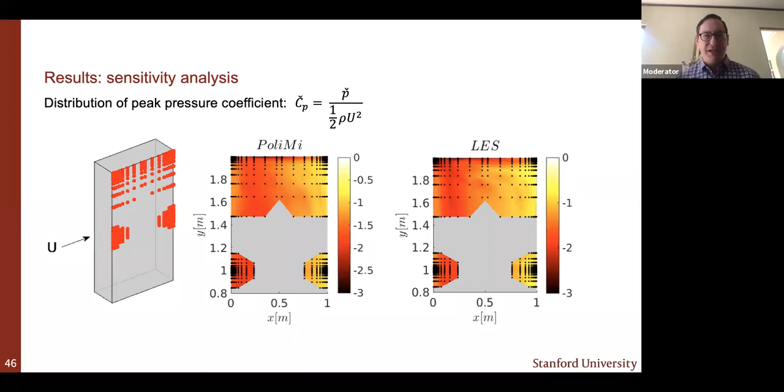Moving on to computational cost, it's incredible how long these simulations take from my standpoint. So someone's asking whether you can estimate the runtime in CPU hours, for a local machine or on Stampede. Yeah, that's what I mentioned in the setup. We have 80,000 CPU hours on 64 processors on Stampede 2, and that corresponds to about 7 weeks. The key to me in trying to speed these up will be trying to use bigger time steps.

We've had really successful results using a different code than OpenFOAM. I think looking into how this could translate into getting speedup in OpenFOAM as well is something we should really focus on. We just picked the methods that we thought would give us good results, and from there we want to look at how we can speed up these simulations without compromising on accuracy. I hope that answers the question.

If it was needed to speed up computational efficiency, are there things you could relax, and would you be able to quantify the error in that case, or would you not be comfortable sacrificing accuracy for the sake of speed?

It really depends what you want to do with this, right? What we wanted to do here was really show that LES can do this, and it's something that's not generally accepted yet. LES can do it, but the way we did it, it comes at a high computational cost. Whenever you start to relax something, you need to check on it. That's why it's so important that we do more validation studies and start to understand better what we can relax and what not.